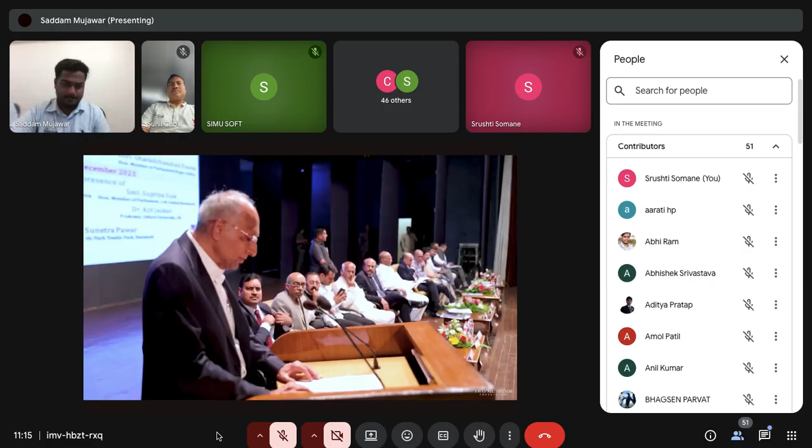As we stand here in India's first rural center of excellence in digital manufacturing and robotic automation, I am reminded of the transformative power of education. Education is not merely the acquisition of knowledge, it is a catalyst for innovation, a gateway to progress, and a key driver of social change. The students of this esteemed institution are not just learners, they are the architects of our future, equipped with skills and knowledge needed to navigate the challenges and opportunities of the digital age.

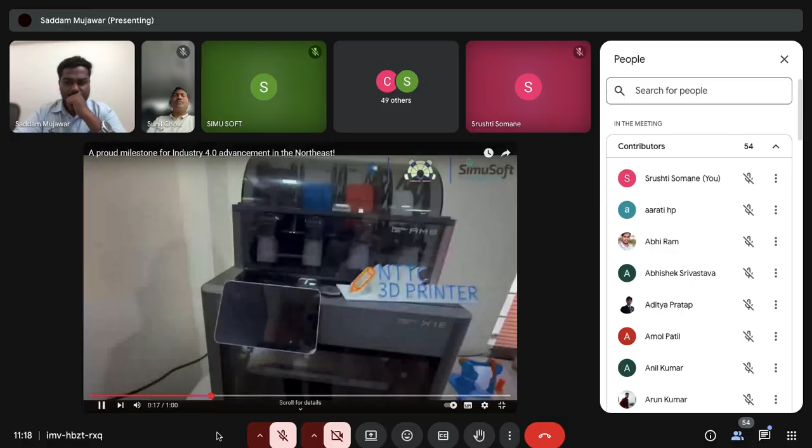So this is all about our Nagaland Center of Excellence. Now, in KBP Satara, Karmaveer Bhaurao Patil Satara, in Rayat Shikshan Sanstha, in the Engineering College we have recently established a Center of Excellence. So this is the small video of this KBP Center of Excellence. Please go through it.

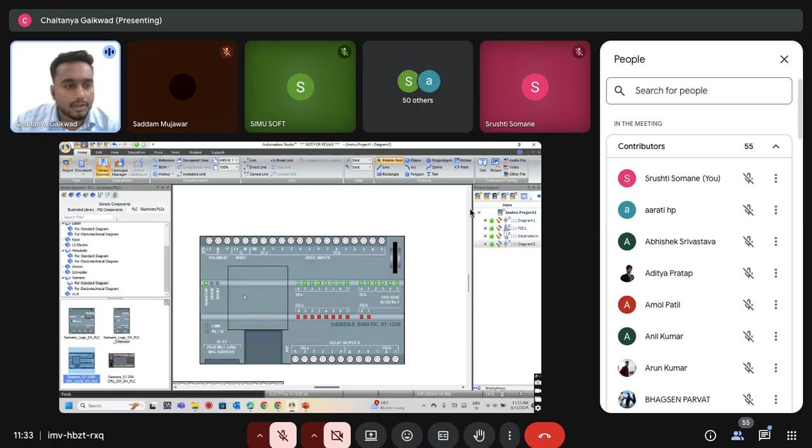The main issue is either a lack of knowledge, or not knowing the connection type - there's a term like sinking and sourcing. If they didn't understand this and directly worked on the hardware, they could damage the system, or an accident may happen. These risks are being reduced with this software. We are entirely reducing the hardware cost with the help of this one software, because it gives me PLC, electrical, robotics, process instrumentation, hydraulics, and pneumatics - nothing is left out. So all the hardware and actual field work that we would give on hardware, we are doing on simulation.

So I was here with the electrotechnical section. Here we can see I have all the control and power components, right? We can take it from DC motors, AC motors, stepper motors, to many things. And one more important one is the HMI and control panels.

I'm not just connecting the components and simulating it, we are comparing with the actual hardware. I have all the components which are moving actually, and when we have to start the simulation, as I'm getting started, I can easily just switch on, switch off, and connect it with all the things.

So now today we will start with building a small electric vehicle circuit. Today I am going to show you first one simple relay logic for controlling the headlight and the indicators of our car, or any vehicle. So what we need for that and how the components work, let's see.

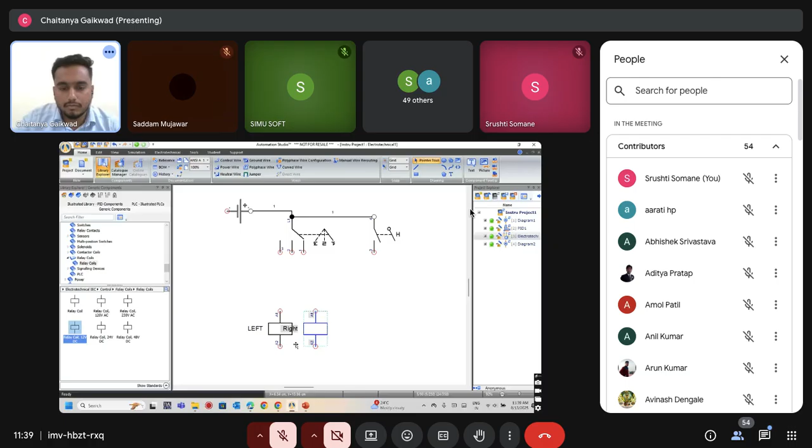The same one, I will take another one. I need right now. Right. Then I will take one more for my headlight.

And this software is completely Windows friendly, so we can use all the shortcut keys which we are using for our Windows applications too. So I'm giving it a name. And one more interesting feature this software gives us is for animation, so I'm also going to show you how we can give the animation.

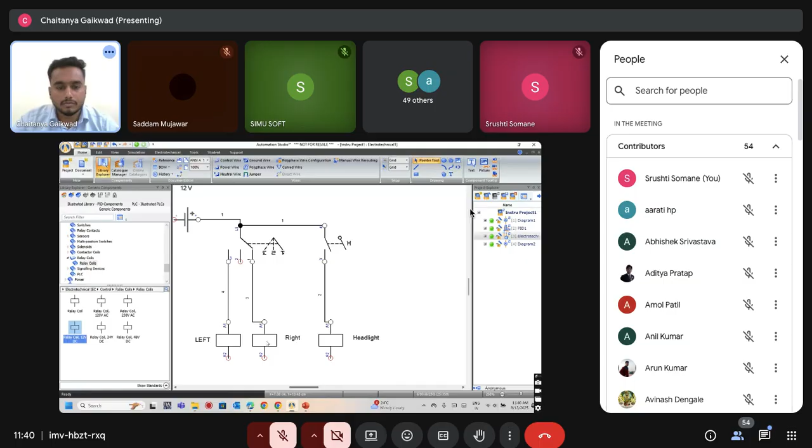Now I will just directly connect, then move this. It will go, so you can see this is symmetry. I can either connect all this and give them to the return path, so all my positive and negative ends are connected perfectly. Here we can see all the A1, A2 points, connecting points, and the terminals very clearly.

Now what I have done till yet is I have just selected the components and connected all the dots. It is just as simple as making a rangoli by connecting all the dots. It is that simple, and I have nothing else.

But now here is one important thing, I also have to make sure there is proper protection. So I will take one single fuse and name it as well. So this is my blown fuse, and as you can see, there is a name coming like 32 ampere. From settings we can easily change it from 32 to whatever security parameter we need, like 6 amperes, 5 amperes, and also here we have connected everything.

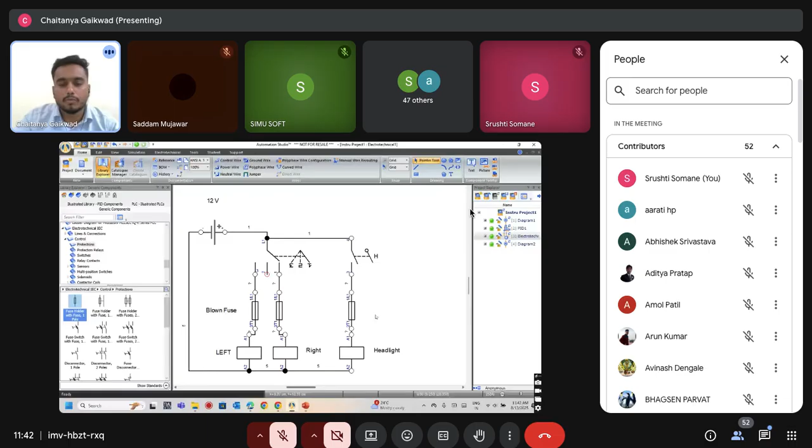Now what will happen is when I am closing this switch or this multi-position switch, the particular relay will get energized. From this particular relay we are going to switch on the different LEDs or the different lamps.

So for that I will go to the signaling devices. In these signaling devices, I have different types of lamps, pilot lights, rotating lights, and audios, horns, bells, buzzers. So from here I will take one lamp - directly we have the option of a 12-volt DC lamp, so I will just take this one.

One for this one. Now, there is one thing - the other end, like the neutral end, I can directly connect it to the negative part, or I can do a simple thing. From here I will check if I have ground. For now we can connect this also.

Okay, so here now I have to give the actuator, so now I need the relay contacts. Here I have the relay make contact, break contact, 3-pole contacts, and all other systems too. From here I will take one make contact, and now I have to connect this with any particular relay.

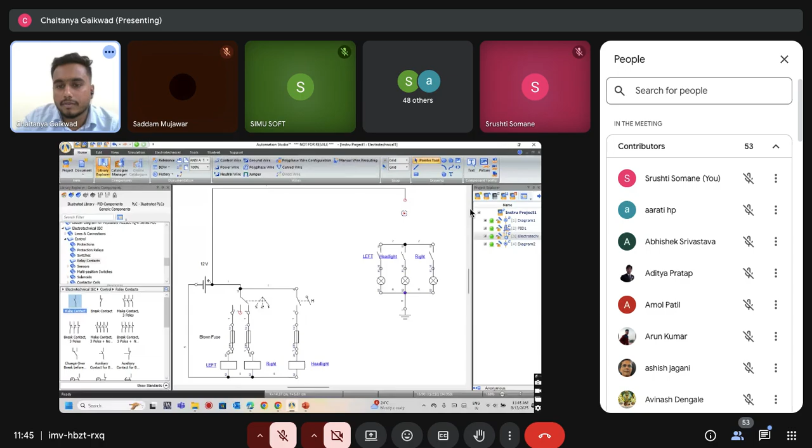So there is one more thing - we also need to give protection to our headlights too, so I will just copy and paste them. And if there is any wrong connection, I can easily use the shortcut like Control Z or anything, and we can undo at the complex circuits as well. So this is a little bit complicated - if anyone is getting confused, just ask any question if you have.

And I have connected all the fuses for protection of our lamps. And from here in the simulation tab, I can start the simulation.

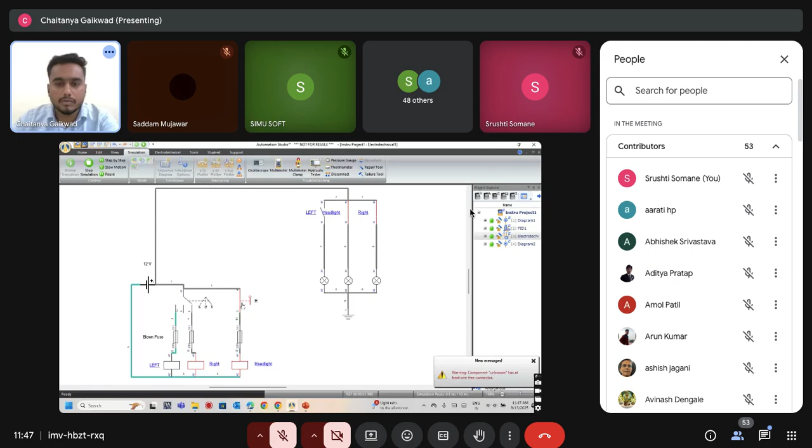I will just change it. So here you can see, when I'm switching my multi-position switch to the left side, my left relay is on. In the middle, the middle thing is on, and from the right side, the right relay is on. And here, the headlight is on.

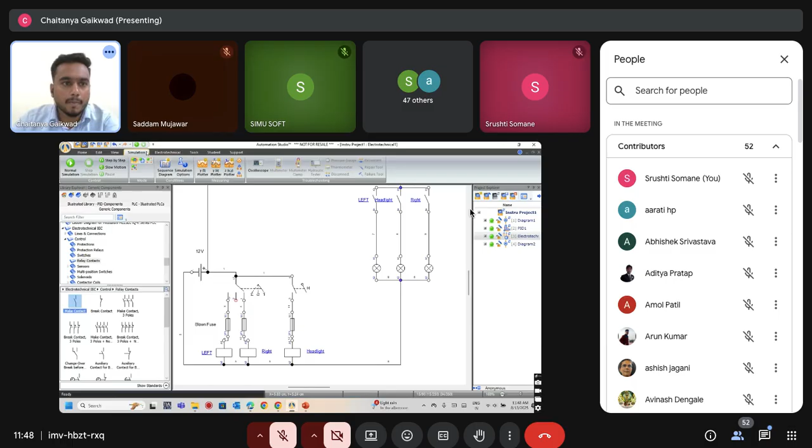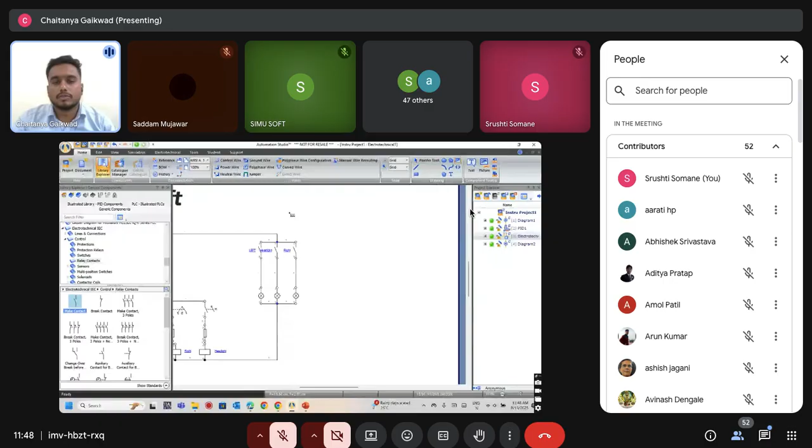This way we can connect them. Now I will show you the animation part. For that, in the Home tab, I have an option to insert any image or other things, just like we insert into our PPTs and all. So from here, I will take one headlight which I have already downloaded, and I will just stretch it. See, this is stretched, and then now I will take one more.

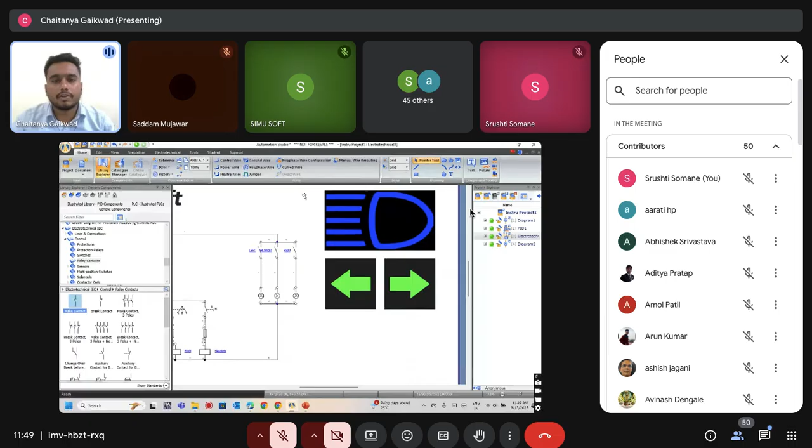We will just minimize this one and then copy, paste, and rotate it to the side - this is to show the left and right. Now here we can easily see we also have the CAD drawings features.

So I will just give the animation now. Here we have the option to give animation - these 9 types of different animation we can give, like translation, free rotation, blinking, visibility, resizing, continuous rotation, and all. So I will give this visibility translation, where initially the symbol will be invisible and then it will get visible.

And the same way I will search here for the headlight - headlight is connected, and now for our left indicator we will see the blinking. With visibility, we can also give the time - how much time it can be visible and how much it will be invisible. And it is connected - the same way we will give the blinking sign for our right indicator.

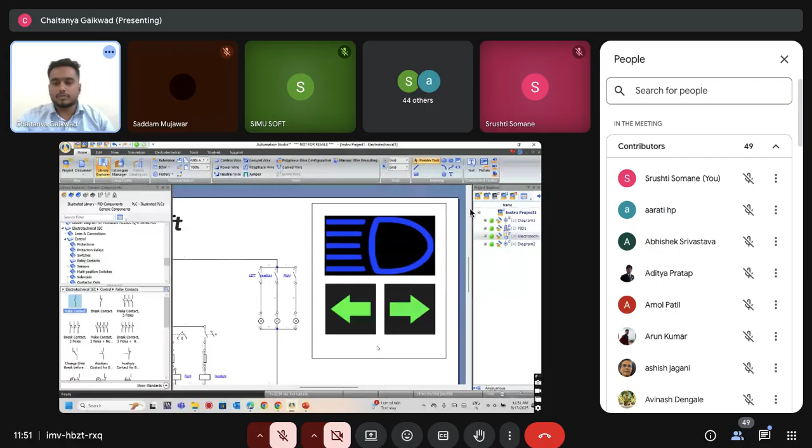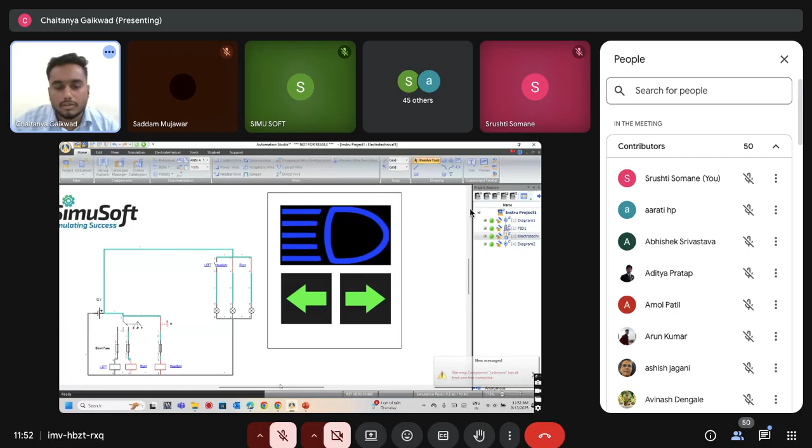So this is connected, and now we can see now everything is closed. We have observed that only when we switch on the headlights is the headlight symbol visible. So you can see when my headlight relay is getting on, at that time my headlight symbol is there, and when I'm switching to my left indicator, it is getting blinked. The same way it is for the right indicator. So such visibility, rotation, or other animations also we can design for proper learning.

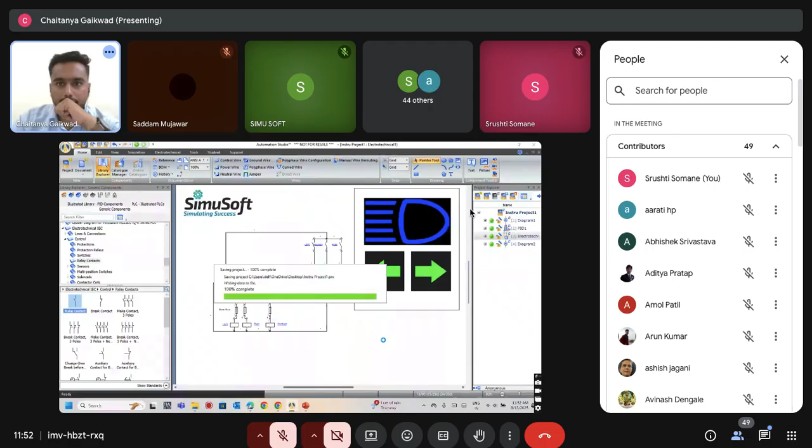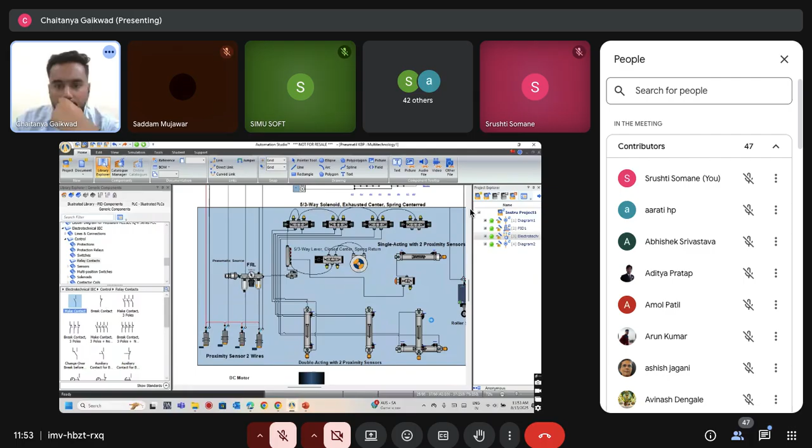Okay, so this was the basic circuit, where we can understand how the power is coming to the relays, and then after that it is going to the lamps or other things. Now I will show you one more circuit. Not this one.

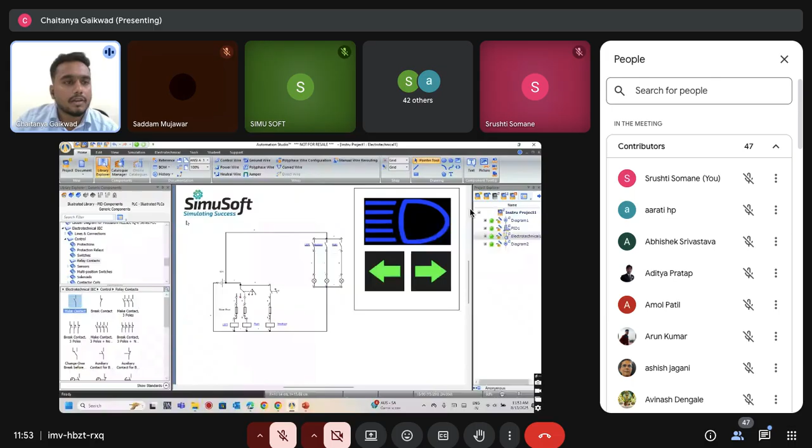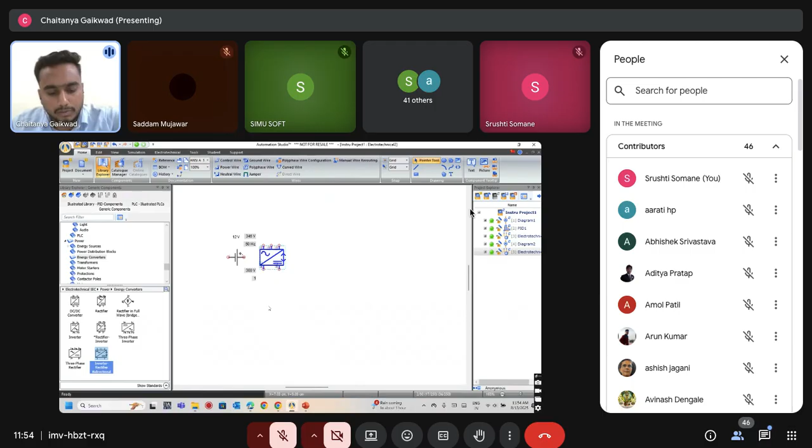Now I can show you how from a battery we are connecting an inverter or power converter, and then we can easily give the power to our wheel, and how the mechanical drive components are being connected. So I will just make it fast now. Here I will take one battery. Okay, so this will be my 12 volt, and then from my power library I will take one energy converter which will convert this DC to AC. From the transformation tab, I can easily rotate my battery or change the component size.

In motors, we have all the different types of DC motors, single-phase motors, three-phase motors, synchronous motors, and all. So I will take currently one motor. We just want to see the angular speed of the motor. That's why I will keep only this one visible and connect all the dots. Now, what we will do,

from our environment and control, I will take one control device. Give it the name V, and we will take one more thing. From here, we will take one pedal, to show how when we press the pedal, the supply is going to the motor and its speed will get increased.

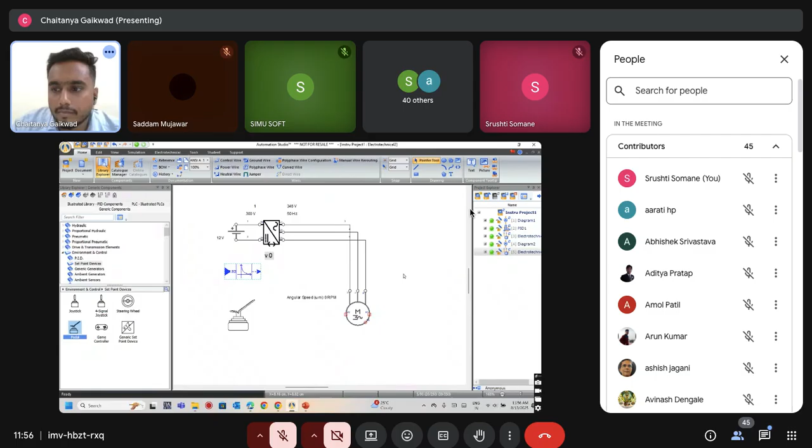Here in data we will just see, as we have connected a three-phase motor, I will set the value to 400 volts. Then in my pedal I will set this value to 50, so that we have 0 to 50 hertz as the frequency. And then in our inverter, in frequency I will select the pedal. For frequency, and for line voltage we'll select the V.

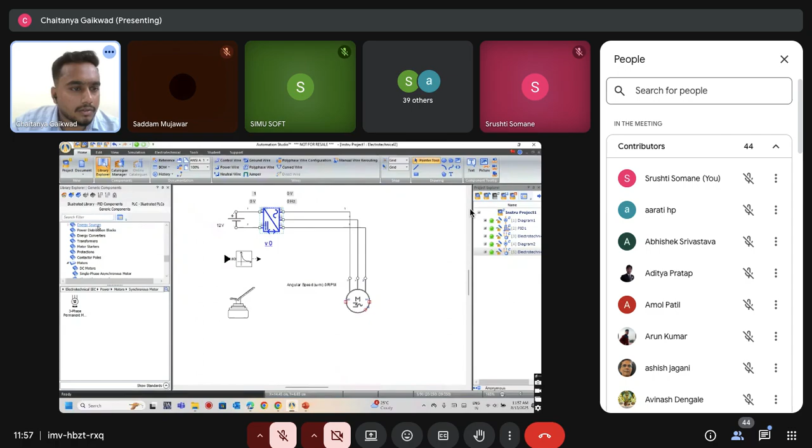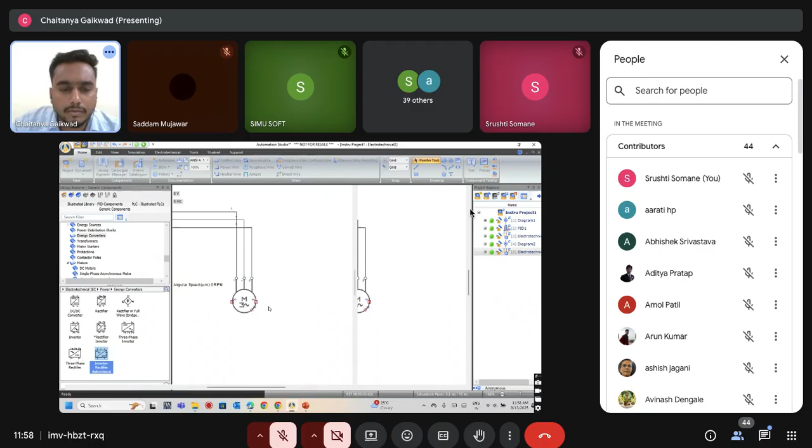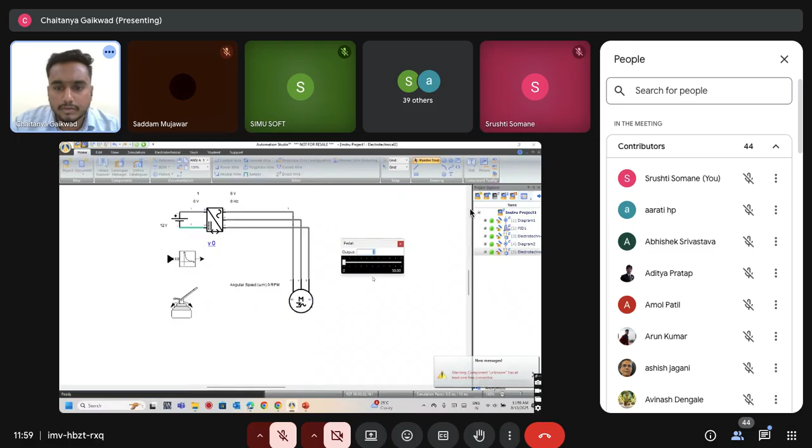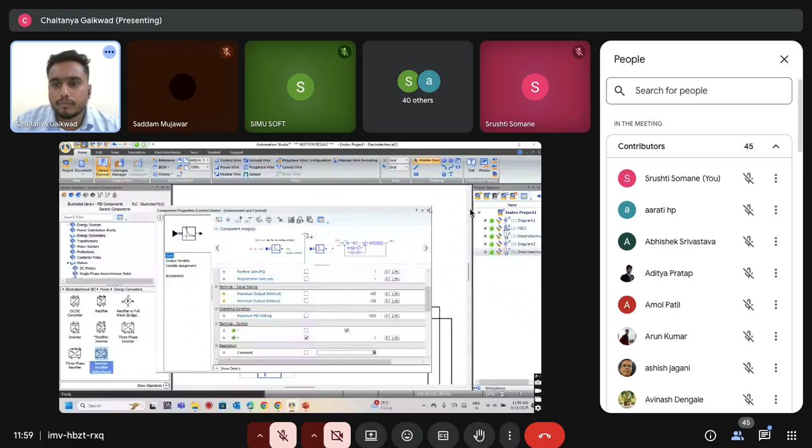Okay, got it. So now we can see that from this side the voltage is getting changed, frequency is getting changed. PID is getting activated and all. Screen stop.

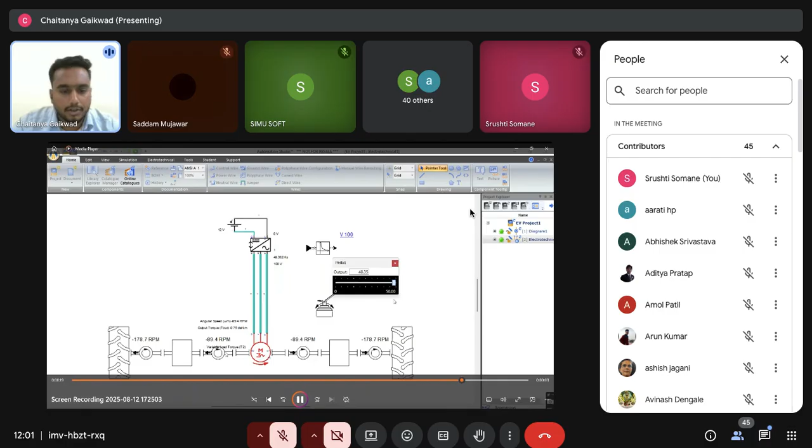So here you can see when I'm increasing the pedal output, at the same time the voltage and frequency are getting changed, and from our energy converter the supply is going to the motor where we have connected the variable load. We can see the RPM also, and we have connected the tachometers, gearbox, and then a wheel to our system to show the simple transmission.

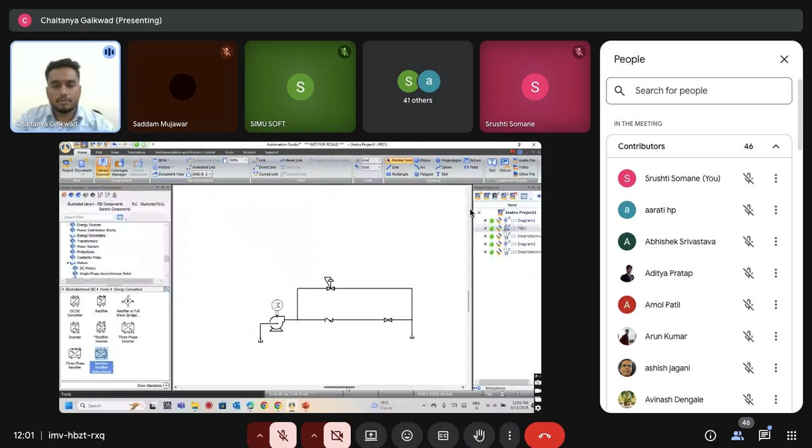So now we will start with instrumentation and process, where we will see the instrumentation library components, and then I will show you a simple hydraulic system in the instrumentation process diagram. Okay. So in instrumentation and process diagram, we have two parts. The first one is contact with liquid, which is for our hydraulic system, and contact with gas refers to our pneumatic system, where the steam powers and all.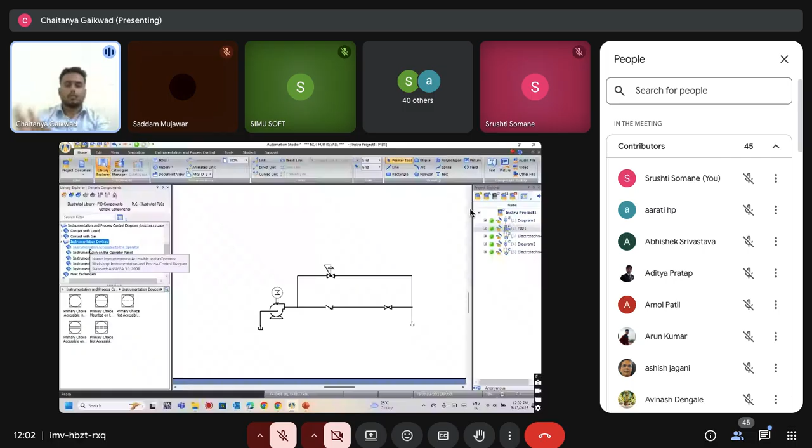And in this we have added the turbines and heat exchangers, then instrumentation devices. Okay, so first we will see the generic part, and then we will move on to the illustrated components, which are more interesting and very easy to understand. Now here I have taken one centrifugal pump, connected one motor. We have taken a reservoir from where the fluid is coming, going to the centrifugal pump where the motor is on and it is supplying the power.

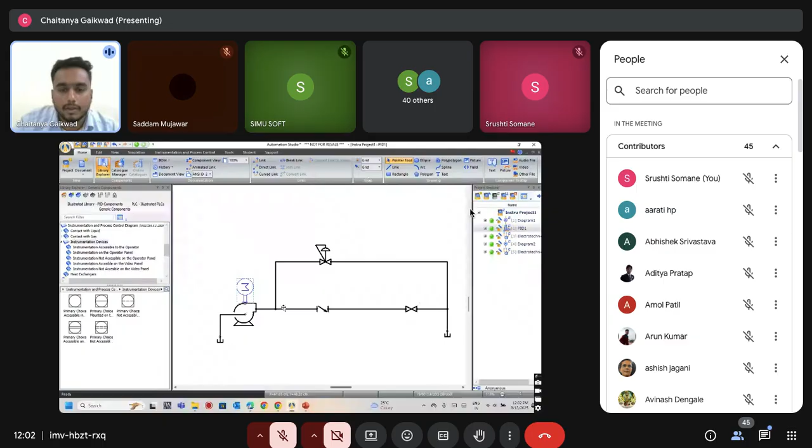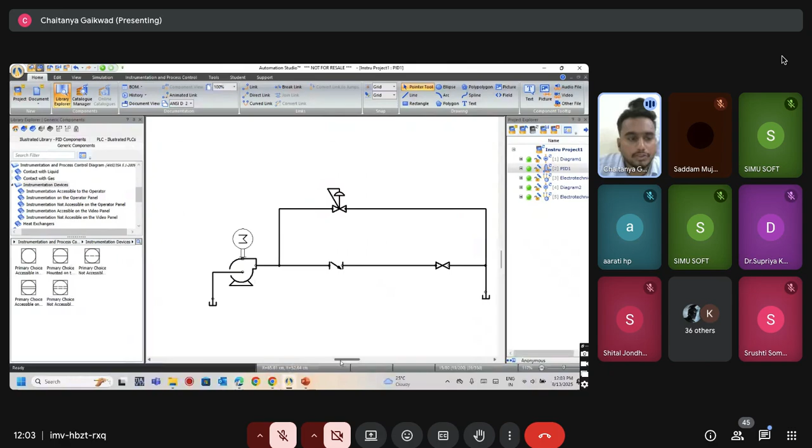Now here I have connected one check valve, then one normally open two-way valve, and here we have the internal tap back pressure regulator. So in a hydraulic system, it needs a particular pressure so that it will get on. Okay, so to measure all this, I have different pressure transmitters. So I will connect one pressure transmitter over here.

Then I have, in flow transmitters, orifice type transmitters, pitot type transmitters, then a turbine type. So I will take this turbine type, and we will also see one pressure meter, a differential pressure transmitter, which I will connect over here.

Okay, now we have connected everything, and we will also check what the temperature is inside all the connections. So this is our temperature. We can also check the differential pressure gauges and thermometers.

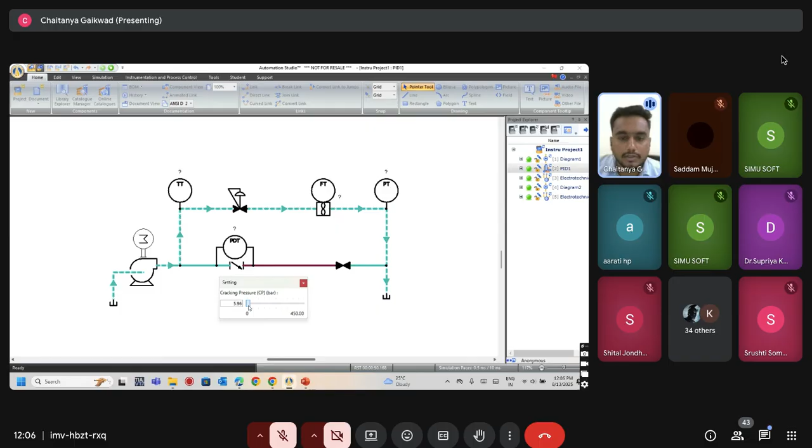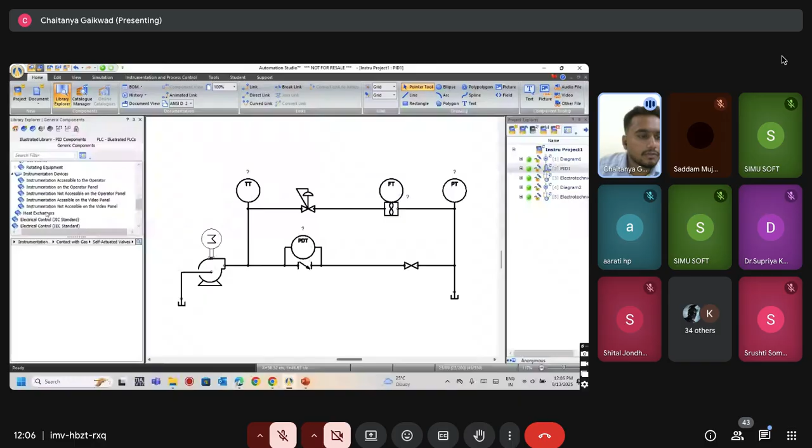Now this was for this library, a small circuit where we have the two paths, path 1 and path 2. Then the same way it is for gas, we have the measuring instruments like transmitters, flow, pressure. Then they have different ones like two-way, three-way check valves, and self-actuated valves also. In this, we also have one more thing, that is the heat exchanger.

Sometimes it is like pneumatic or hydraulic heat exchangers and other things which are actually used in industrial P&IDs, by process, instrumentation and mechanical departments. So this clears all the process flow required components, which types of transmitters, gauges, and power components are being used, types of valves for hydraulics, pneumatics, and steam power, and also the replica. We can replicate the SCADA features for monitoring or the animation.

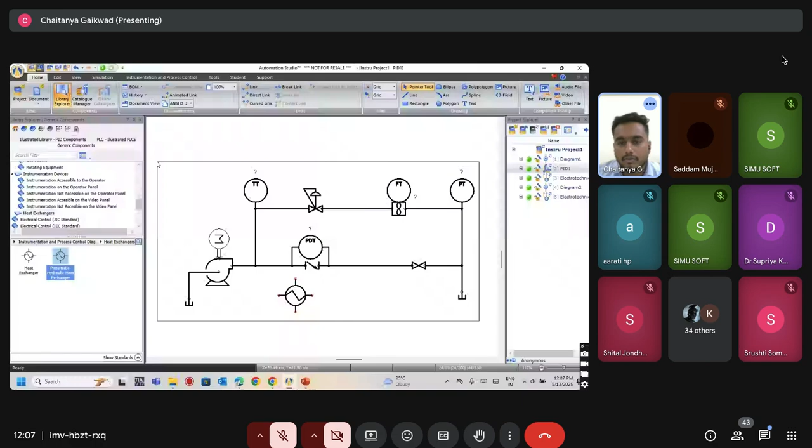Now, I will show you one more circuit where we have the illustrated library. Firstly, I will show you the P&ID components of the illustrated library, where we have a liquid tank of two types. Then we have the transmitters: pressure transmitters, flow transmitters, temperature and gas transmitters, level transmitters, one of which I have used over here. In that we have two, a radar sensor type and a capacitance rod type.

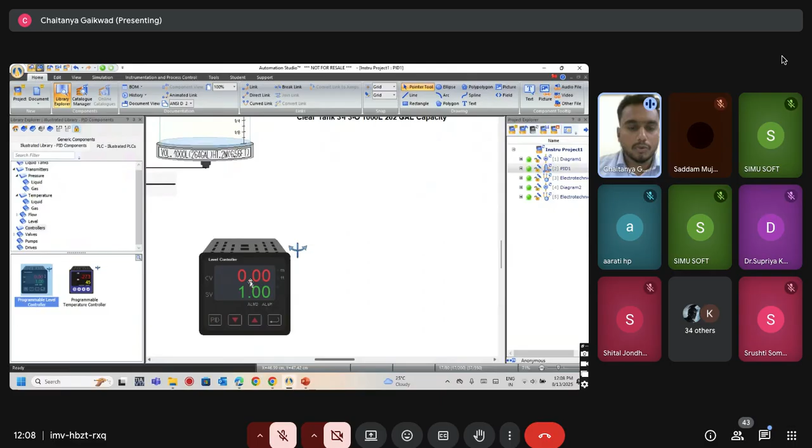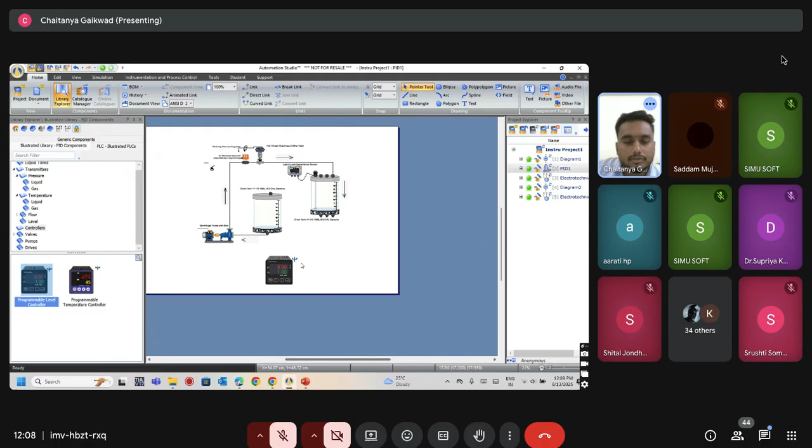Then we have different controllers like programmable controllers or PID controllers for chilling or heating purposes, where we can give the inputs and set them for particular switching, like if I have set it for 110 degrees centigrade it will get switched off, and if the minimum temperature is 90 degrees centigrade, it will turn on. Such types of connections we can also do over here.

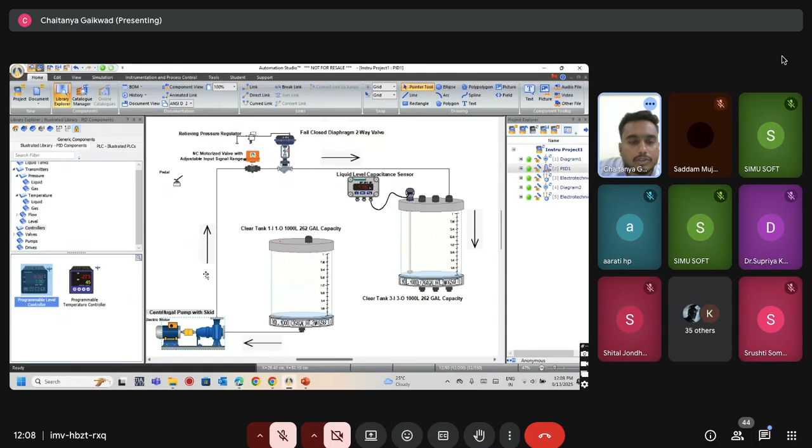So from this I have created one simple closed-loop system, where you can see I have one tank connected to one centrifugal pump with skid, where my electric motor is the actuator to this pump. Then here I have an NC motorized valve with adjustable signal range. So I can adjust all the pressure by the use of this pedal. I have used this pedal to control this motorized valve.

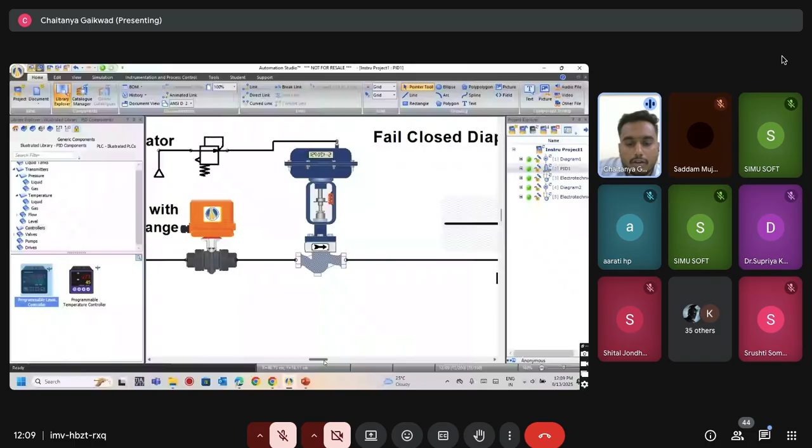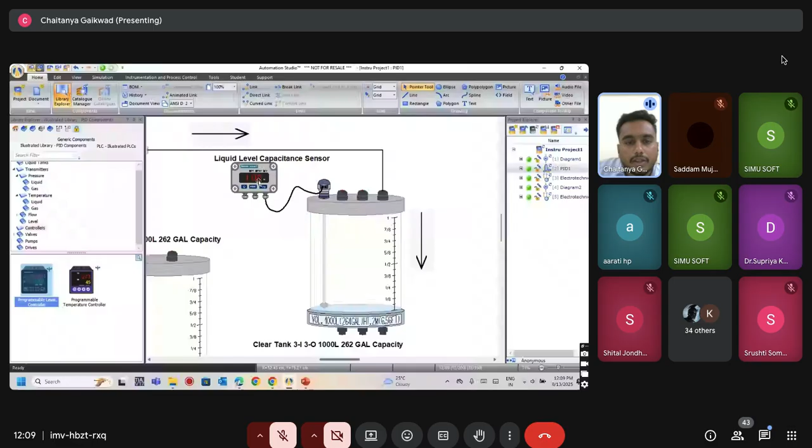Then here we have one fail-closed diaphragm valve. This is also a two-way valve, which will be on only when there is a particular pressure. That's why I have also connected one pneumatic supply to this valve. And by these arrows, you can easily see how the supply is going. Here we have another tank where all the water or fluid will get transferred, and here we can see the liquid level capacitance sensor, which will indicate the water level.

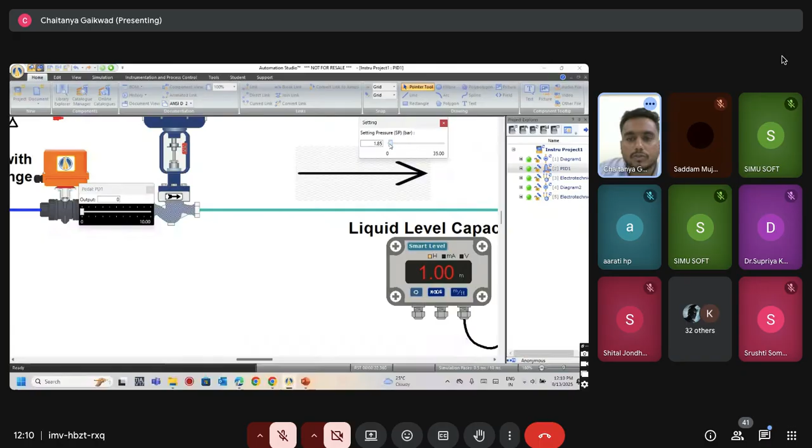Okay, so I will just start the simulation. We can see the motor has started running, and when our pedal is getting on, see, I have also set this pressure, where you can easily see this valve is getting up. Okay, so I have to connect it in the switch way, and it should open the path.

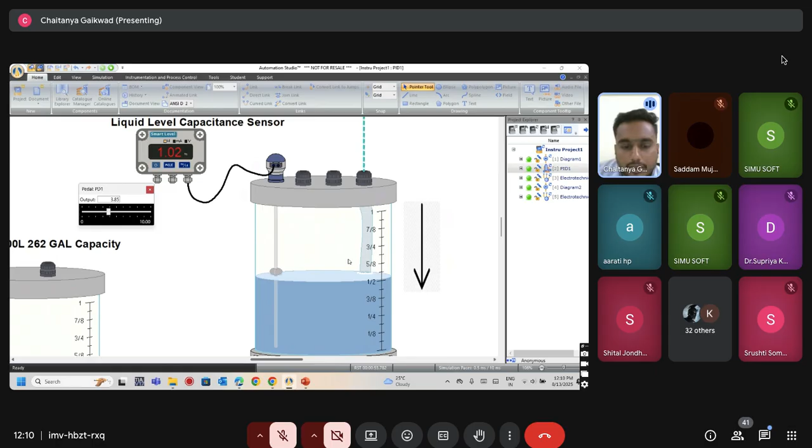And now I am increasing the NC motorized valve opening, and you can see the flow coming from the first reservoir, then to the pump, then to our valves, and going to the second tank, where the water level is increasing slowly, and we can also see the animation of how the water level is increasing.

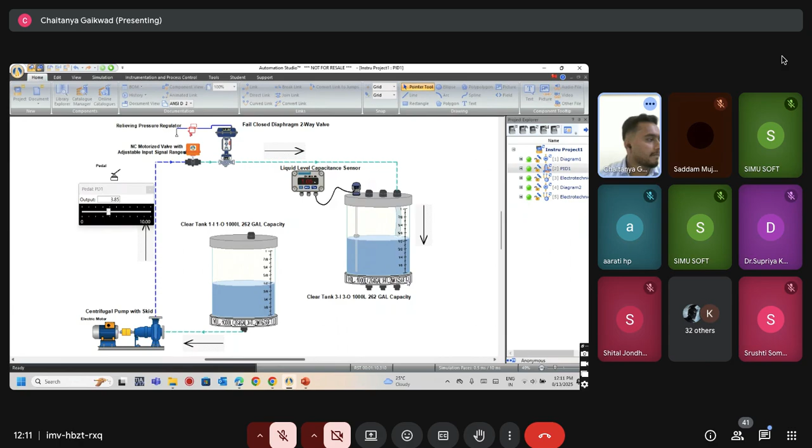Okay, is there anyone having any doubts, or wanting to ask something related to the instrumentation? No, we can continue to the robotics part.

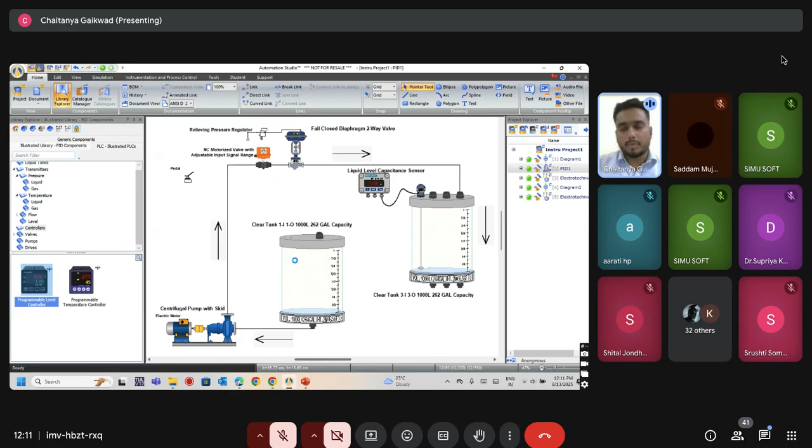Okay, so I think there is no doubt. So we will start with the robotics part now. So I will just close this, or here only I can show you how we can add the robotics. So I will switch my standard diagram to the robotic diagram, so that I can get the robot simulation environment.

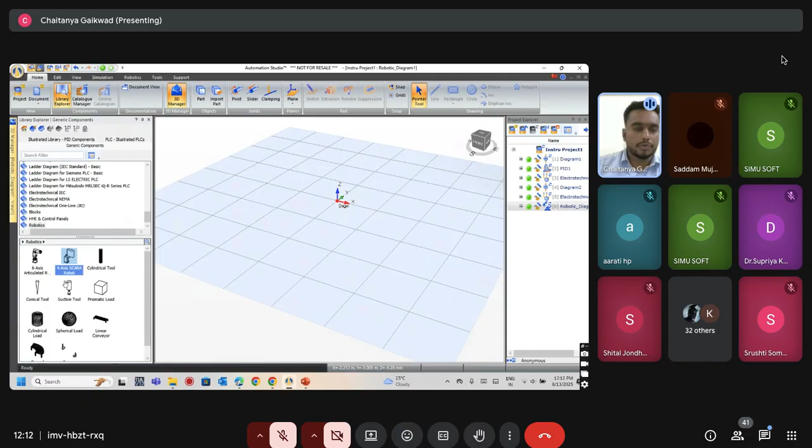So this is the plane where we are going to import all the robotic components. So in here, at the end, we have the robotics, all the robots. So firstly, in this new robotics library, they have introduced a 6-axis articulated robot and a 4-axis SCARA robot. Okay, so I will just drag and drop both of them. See, so this is our 6-axis robot, and this is our SCARA robot.

4-axis SCARA robot. So in this robotics lab, students can easily learn the robot kinematics, robot teaching, the robot's different axes, its workspace, and how it is used in industry, in an automation line, or in conveyor setups for different applications like welding or pick and place or any other.

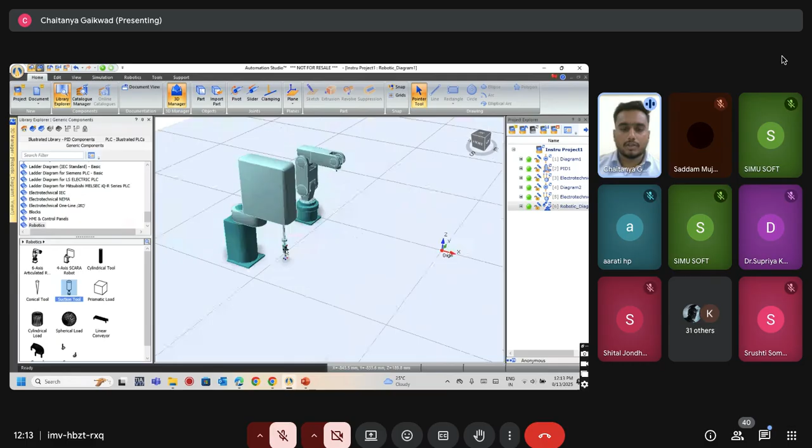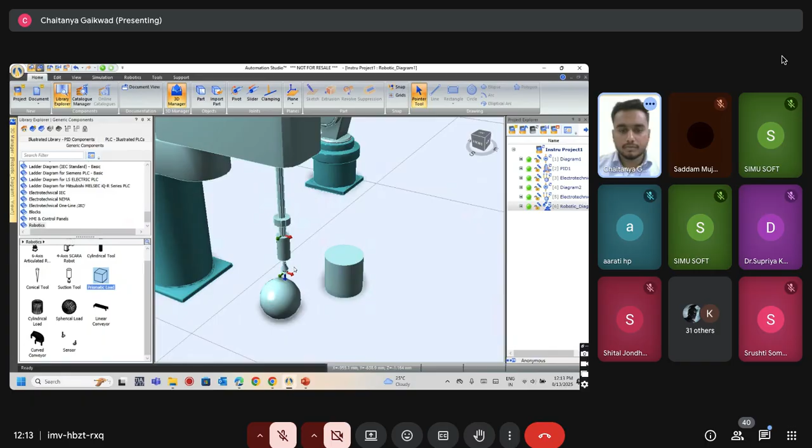Along with these robots, we have different tools like a cylindrical tool or the suction tool. I have just connected this over here, and you can see my suction tool is automatically connected at this end effector. Okay. Now we have the different types of loads like a spherical load or any prismatic load. We have those things. Along with this, we have the sensors,

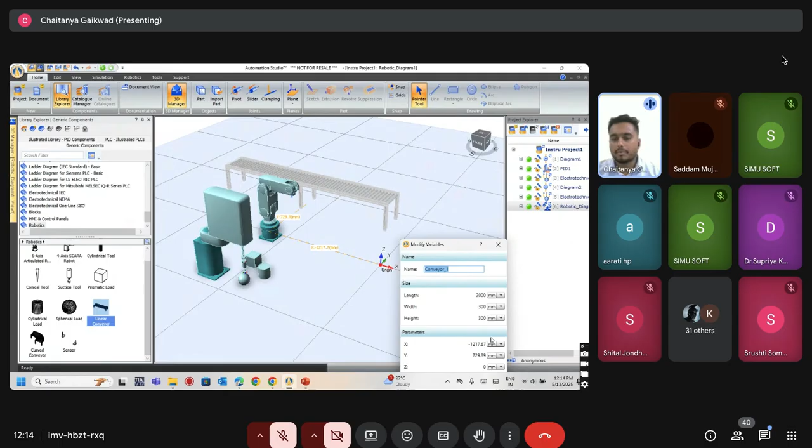we have the conveyor belts, where we can also define the conveyor length, width, and its parameters. We can create any curved conveyor or an actual conveyor setup, and we can place the robot for different applications as per the sensor inputs. Okay. So we can attach the sensors to our conveyor.

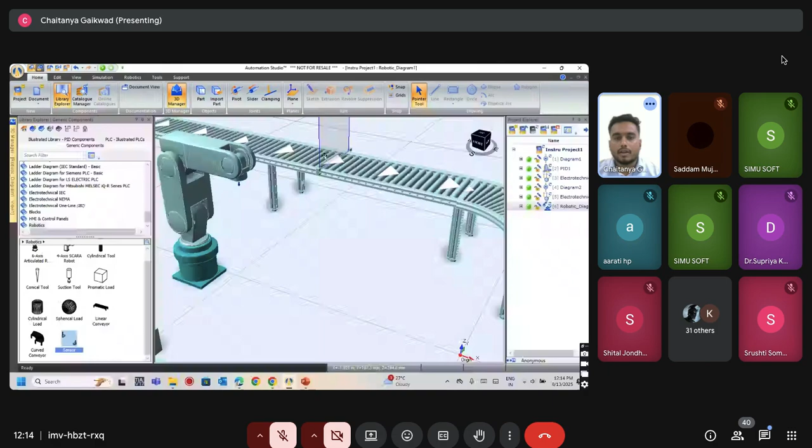See, as any object comes from this end and passes the sensors, it will give a signal to the robot, then the robot will pick and place. But for that purpose, I have to place my robot as per its workspace, or its reach. For example, for a SCARA robot, its reach is as per our need, like 400 mm, 700 mm, and for a 6-axis, 1000 mm, whatever as per its length.

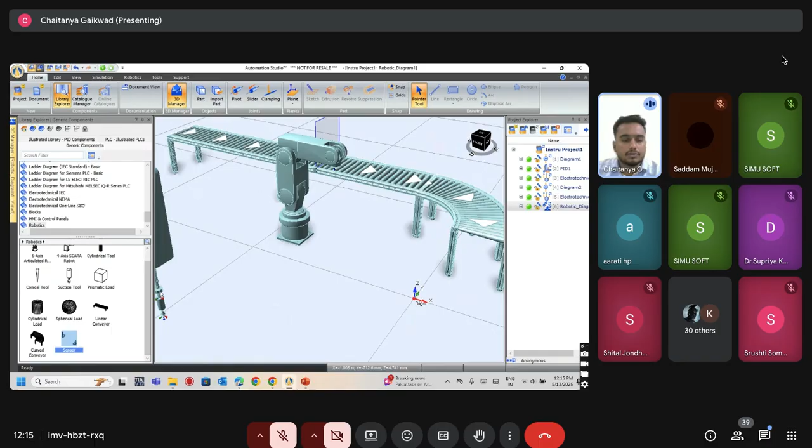Okay. Now I will show you the control panel and other things. Okay. Firstly, now here I will take one load. Okay, I have taken this, and in the robotics tab, when I'm selecting the robot, I have an option of control panel. So as I have said, all the robot kinematics.

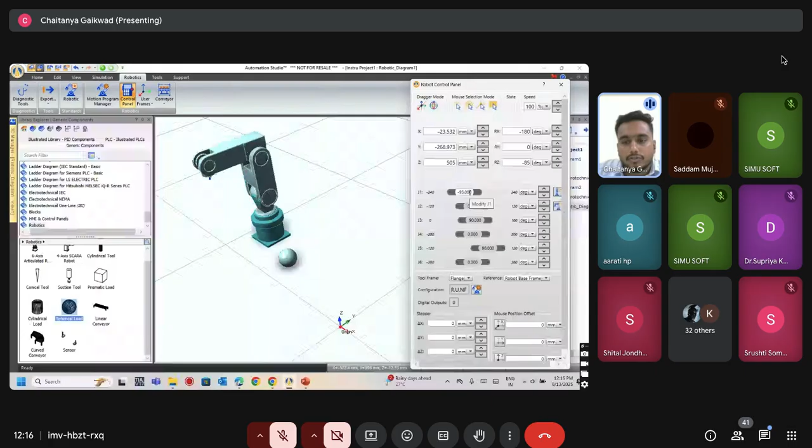So here we can see the dragger modes, the mouse selection mode, its speed, then all the robot movements in its jog mode, in its axis mode, and the pitch, roll and yaw mode also. So here we can see J1 to J6. These are the 6 different joints of this robot. So we can easily move them and see how the particular joints are moving. Individual joints I can easily move and check. So this will help to learn how to use the teach pendant of any particular robot easily.

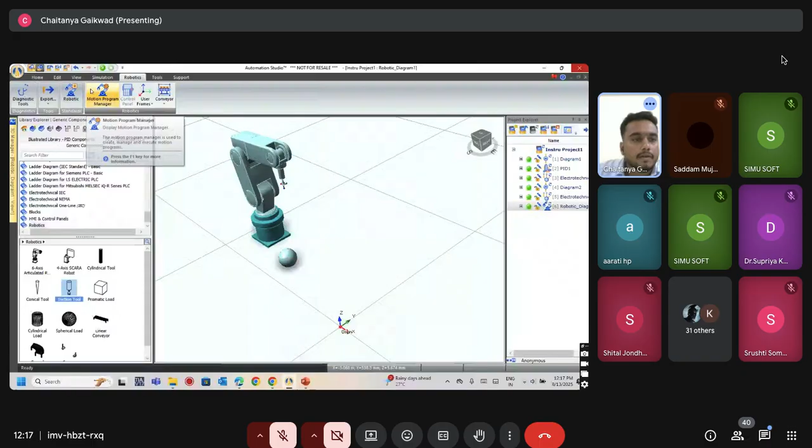Then we have some fixed positions to set, such as its home position. Then in XYZ also we can see each joint getting moved, or teach it. And we can see how the object moves in X, Y, and Z. And here also, with this option, I can easily control the robot directions with my mouse.

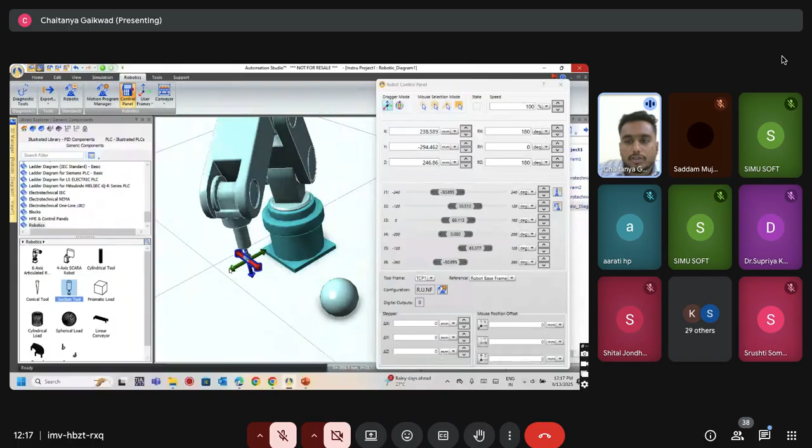See, these were the X, Y, and Z. And when I'm changing my mode, here you can see the pitch, roll, and yaw movements. And again, I can take my robot to its home position. From here, I can select any pickup point for my robot where it has to pick, and here we have the surface or any point where I have to move this one. Okay. So why am I showing you this? Because these are the basic robot parameters or kinematics to check.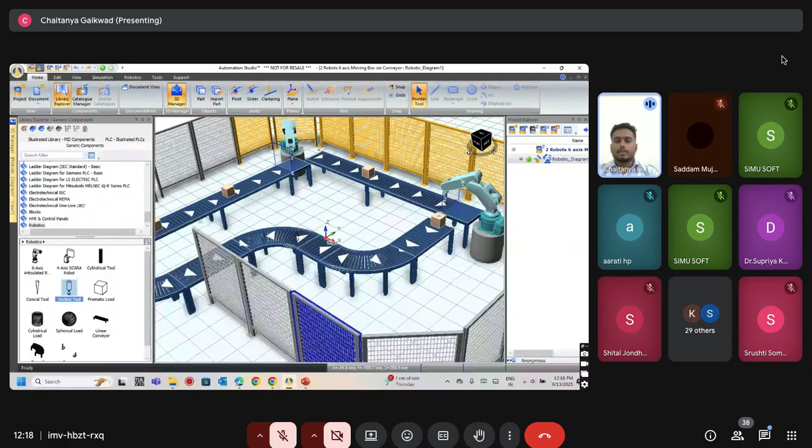Now I will show you the complete line, how we are using the conveyors, robots, sensors and objects to make a complete automation line. Okay, here we have added all the components, the fencing and all. Here you can see we have connected a conveyor belt where at each endpoint we have one sensor. So when this box comes to this sensor, the robot will pick and place it on this conveyor. This is the exact replica of how robots are used in industry. Industrial robots or robotic arms are used for this system.

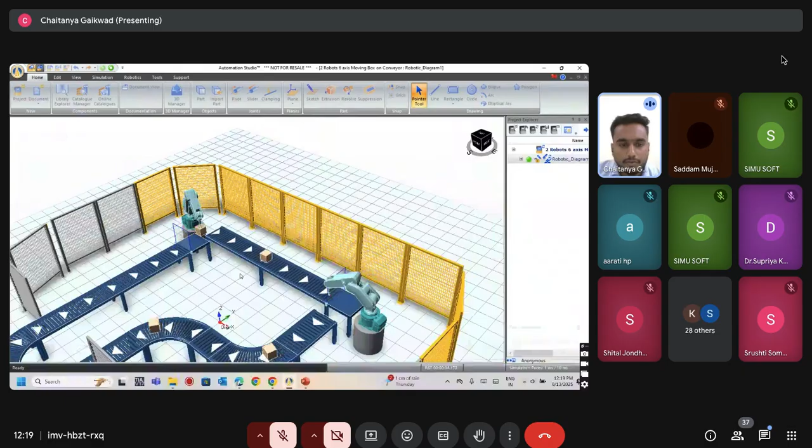Let's see, and the robot is coming. And two robots at a time we have used over here.

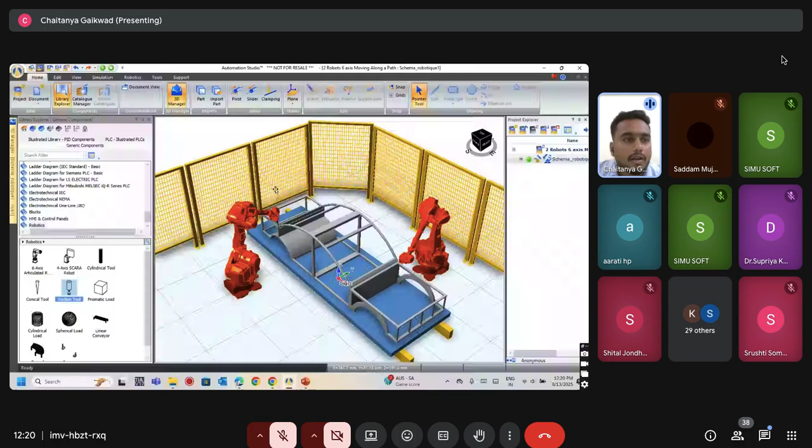Now we will see another example, which is also very interesting, where the robot follows a path. We have connected one welding or point control where it will check all its joints or the path of that particular chassis. So here we have one car chassis and two robots. So as its coordinates are reached, the robot is getting connected.

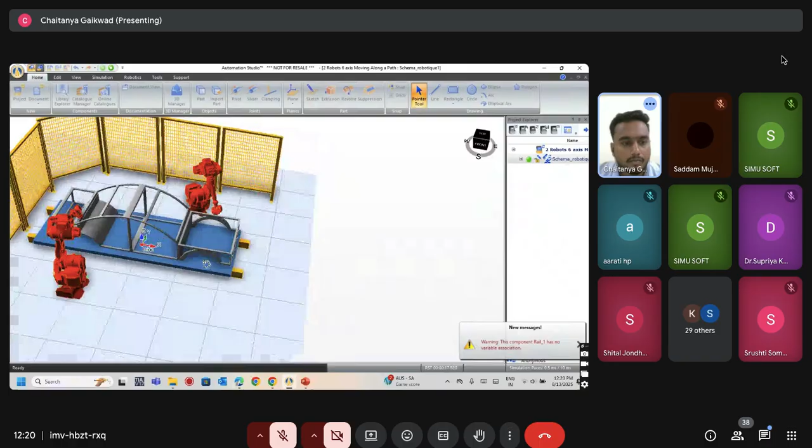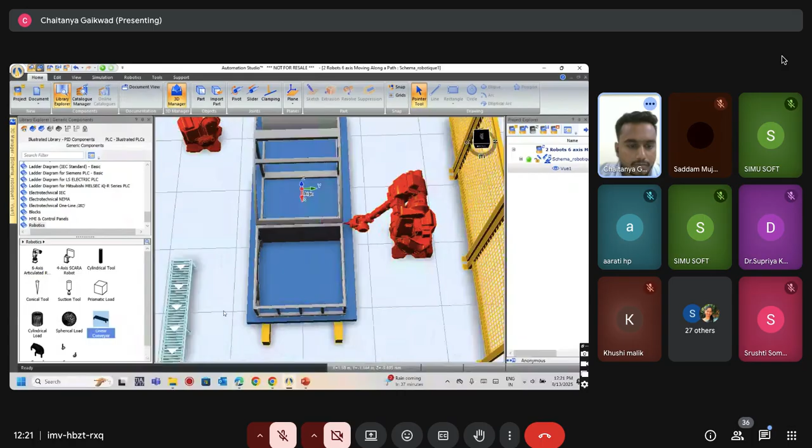So this is also a very interesting part, where we can get the feel of a complete automation line or industrial example where the robots are being used for pick and place, pick and place assembly, or for the welding and all other examples. We have the different conveyor setups. If I have to modify this, I can. I can attach this and give the particular objects through this conveyor for mounting, like screwing, gauging, or any other things.

So this was all from my side for the EV part, then the instrumentation and the robotics. And now we are also coming with a series on the software to explain the different modules. As you can see, the software is very vast and has so many modules. So it is not possible to cover everything properly in a single session. So we will take a session series on hydraulics, pneumatics, and other different modules too.

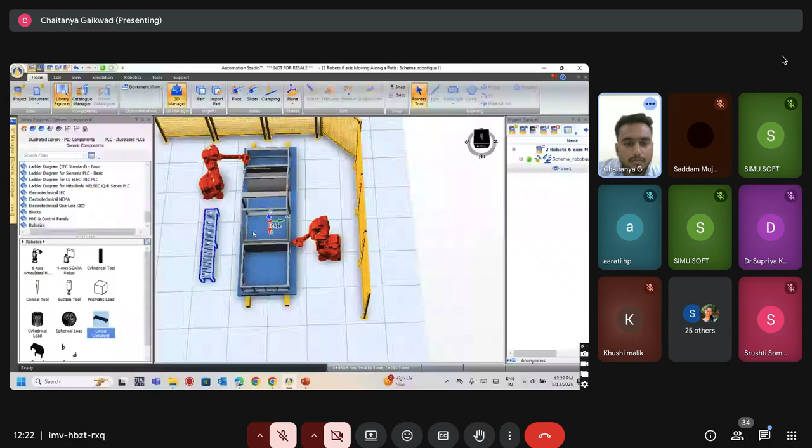Lastly, I just want to say that this software is so powerful that you don't need to buy 10 or 20 hardware kits for your students. You can just have one single hardware kit and 20 or 30 users of this software. Then you can teach all 30 users at a time with hands-on practical experience, where they can connect the theory to the industrial level.

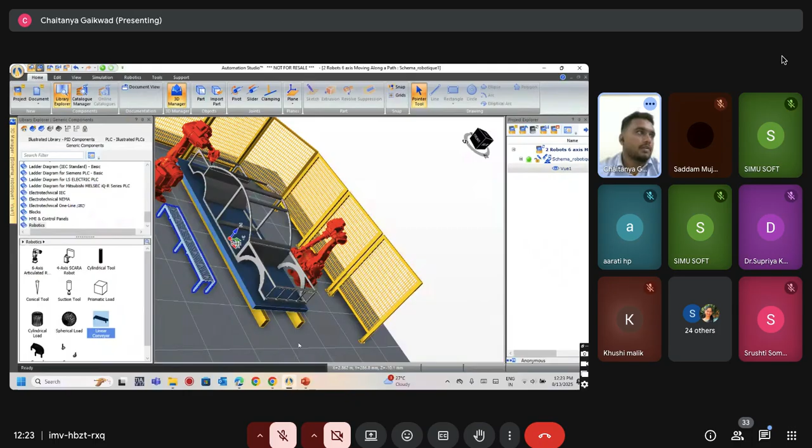Yes, ma'am. We are also building the center of excellence, where we are integrating the simulation with the hardware, because earlier you have seen all our videos, where you have seen the PLC trainer kits, hydraulics trainer kit, pneumatic trainer kit, robotics trainer kit for 4 axis, 6 axis. You have the electrical trainer kit, Schneider Electric trainer kit. So all this you will get in one pack. Yes, it is for ENTC, electrical, mechanical, instrumentation, mechatronics.